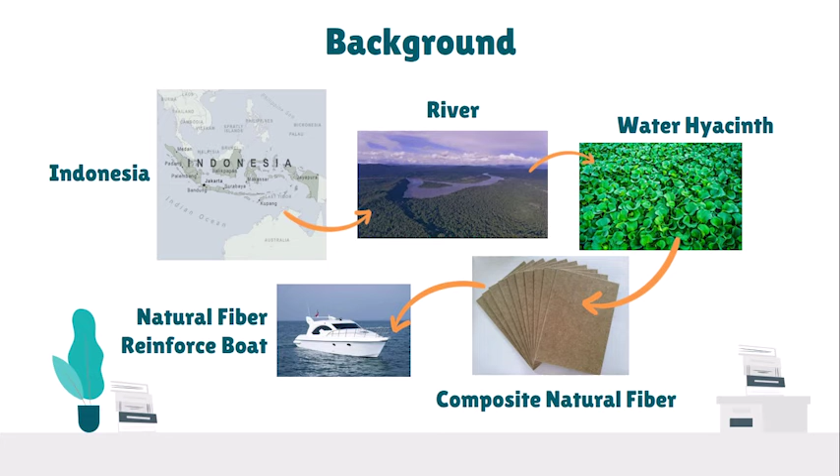So far, the development of composites in Indonesia is still dominated by non-renewable natural resource materials such as glass, carbon, aramid. Therefore, it is necessary to develop raw material for environmentally friendly composite materials, such as natural fiber. The use of natural fiber as a composite has many advantages. Such fiber raw materials are easy to obtain and easy to renew. For example, water hyacinth fiber composite material is very potential in terms of the availability of raw material, which is very abundant, easy to obtain, low price, and non-toxic. From the description, there is the idea to do composite research with water hyacinth fiber and the manufacture of a prototype race boat.

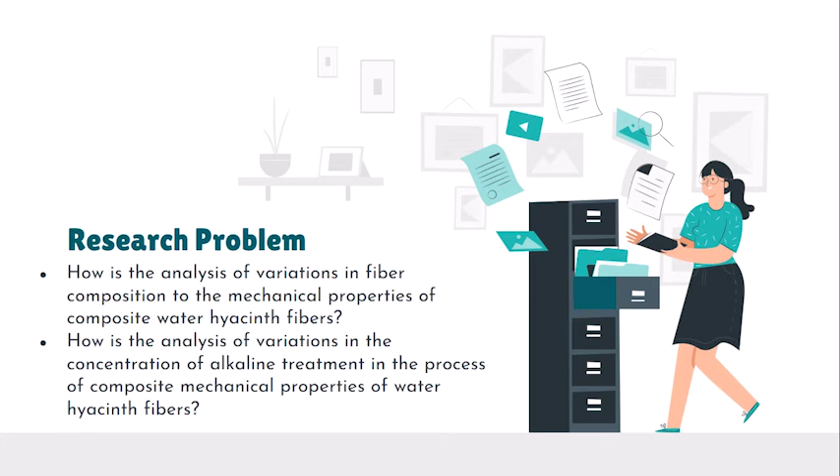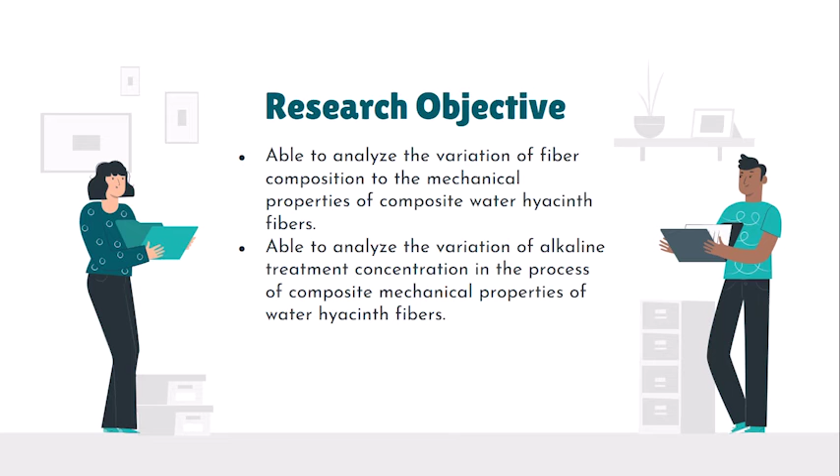Research problem. First, how is the analysis of variation in fiber composition on the mechanical properties of composite water hyacinth fibers? Second, how is the analysis of variation in the concentration of alkaline treatment on the composite mechanical properties of water hyacinth fiber? Research objective. First, able to analyze the variation of fiber composition on the mechanical properties of composite water hyacinth fiber. Second, able to analyze the variation of alkaline treatment concentration on the composite mechanical properties of water hyacinth fibers.

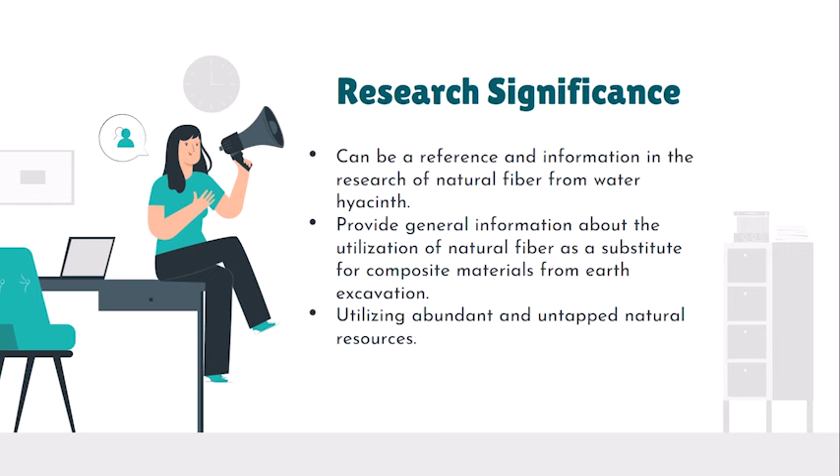Research significance. First, can be a reference and information in the research of natural fiber from water hyacinth. Second, provide general information about the utilization of natural fiber as a substitute for composite material from earth excavation. Third, utilizing abundant and untapped natural resources.

Research delimitation. 1. The type of water hyacinth used is water hyacinth from Kalimalang River, Kentong Village, Glagah, Lamongan. 2. Delignification process using NaOH with concentration of 0% and 5% for 2 hours. 3. Matrix type used is epoxy. 4. Composite fiber and matrix composition used is 30% to 70%, 40% to 60%, 50% to 50%. 5. Composite manufacturing technique used is hand layup.

6. Mechanical testing performed is tensile test. 7. Fiber diameter is considered uniform by 0.5 mm.

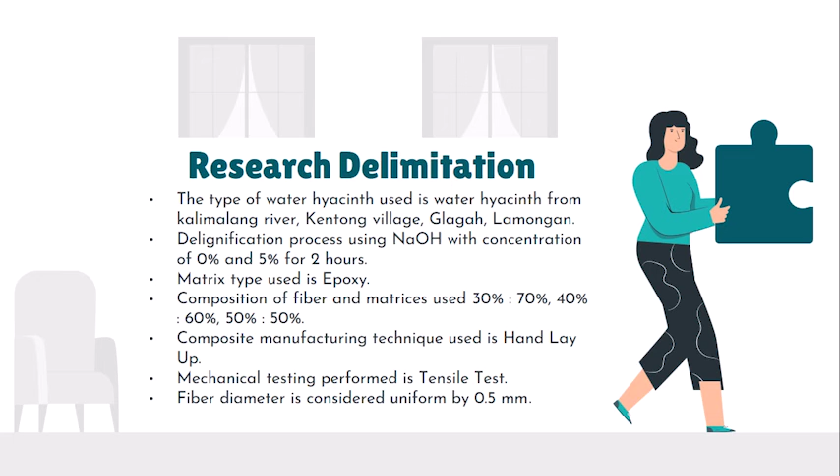Chapter 2. Review of related literature. Composite. Composite is a material composed of two or more main materials where the properties of each material differ from each other, in order to obtain better mechanical properties. Composites have better mechanical properties than metal: Young's modulus over density, and are higher in strength than metal. Composites are formed from two different types of material, namely reinforcement and matrix.

Reinforcement serves as an amplifier or main part that withstands load, has less ductile properties but is more rigid and stronger. Reinforcement can use fiber or powder. Matrix. Matrix is the composite material that acts as a reinforcement binder. So the strength of the composite material depends on the strength of the forming matrix. This matrix has liquid properties with low viscosity, which will harden after the polymerization process.

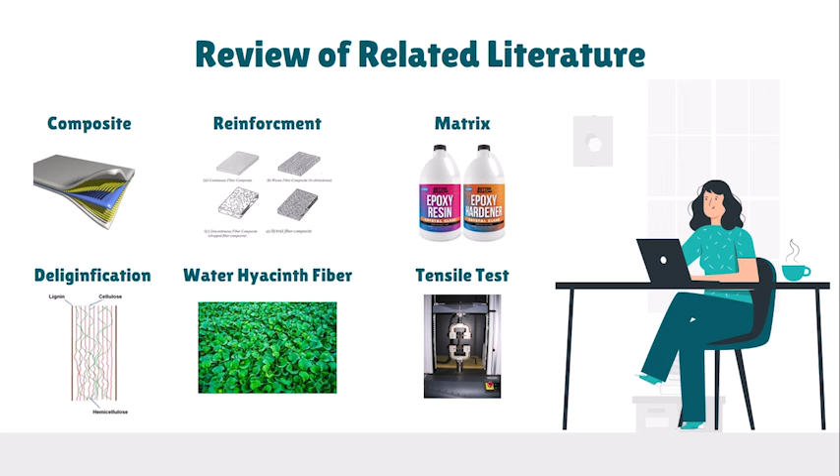Tensile test. Tensile test is a method used on a material to determine the ductility and toughness of a material by applying a force load or tensile stress to the material. Standard tensile testing refers to ASTM.

Chapter 3. Flowchart. First, prepare the tools and material, then make the mold, then do the process of delignification of fiber with an NaOH concentration of 0% and 5% for 2 hours. Next, do the preparation of manufacture of composite with a fraction of volume of 30% to 70%, 40% to 60%, and 50% to 50%. After that, tensile testing is done, then processing the result of testing and data analysis, then compile a conclusion, then make a race boat prototype.

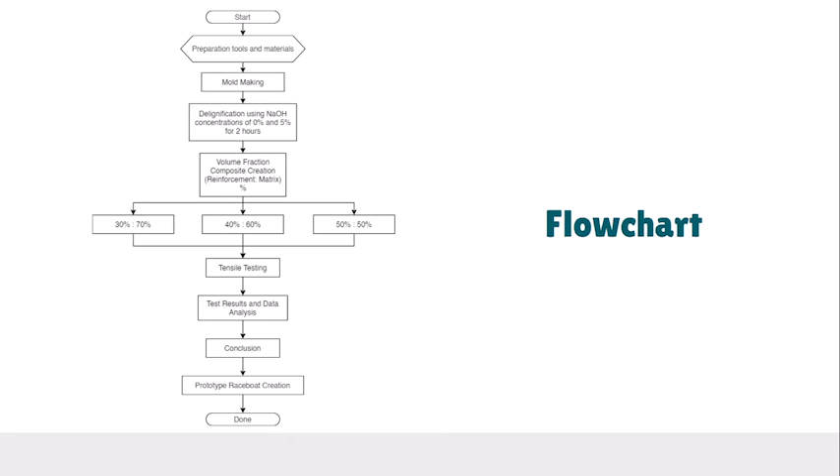Tool and material: screen or mold, basin, spatula, digital balance, scissors and cutter, measuring cylinder, tensile testing machine, water hyacinth fiber, NaOH, H2O, resin, and hardener.

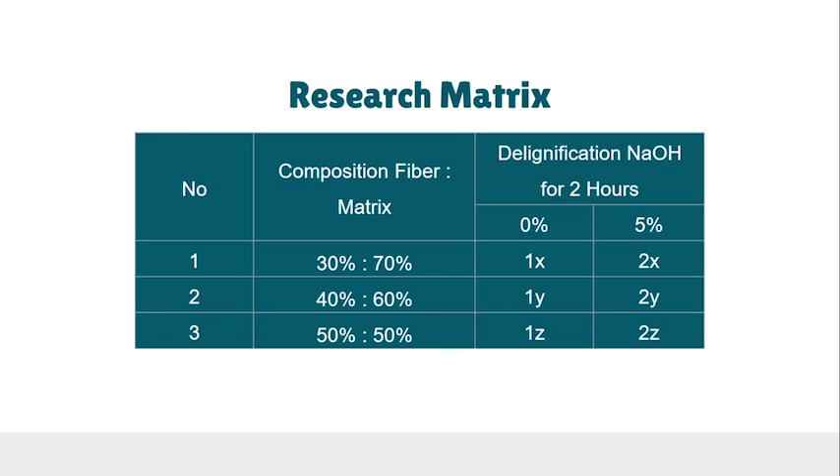Research matrix. This is a matrix of research between variation in composition and variation of delignification. The specimens taken in this table are 6, and each specimen repeats 3 times to obtain a consistent and optimal value, for a total of 18 specimens.

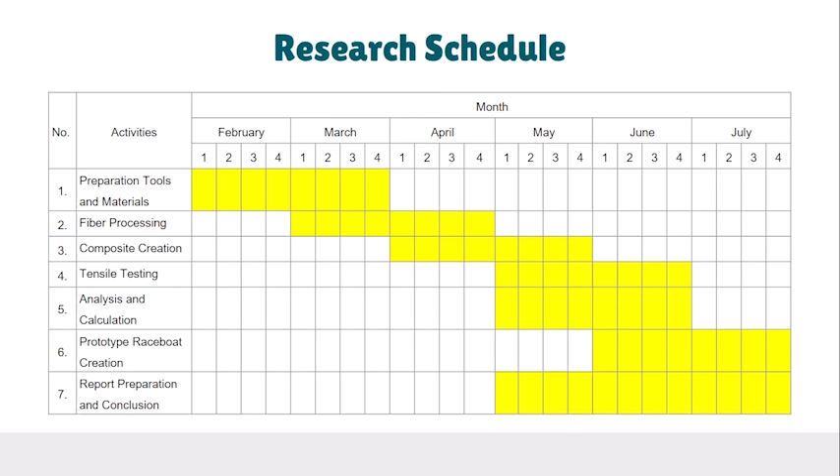Research schedule. First, preparation of tools and materials carried out in February to March. 2. Fiber processing is carried out in March to April. 3. Composite making is done in April to May. 4. Tensile testing is carried out in May to June. 5. Analysis and calculation carried out in the month of May to June. 6. The manufacture of race boat is carried out from June to July. 7. Preparation of reports and conclusion carried out in May to July.

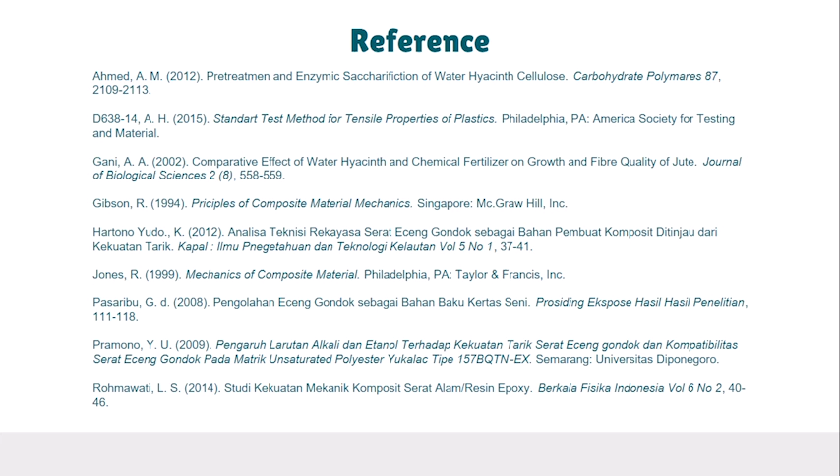The Honorable Examiners, I have presented all the content of my proposal from chapter 1 until chapter 4. That's all about my presentation.